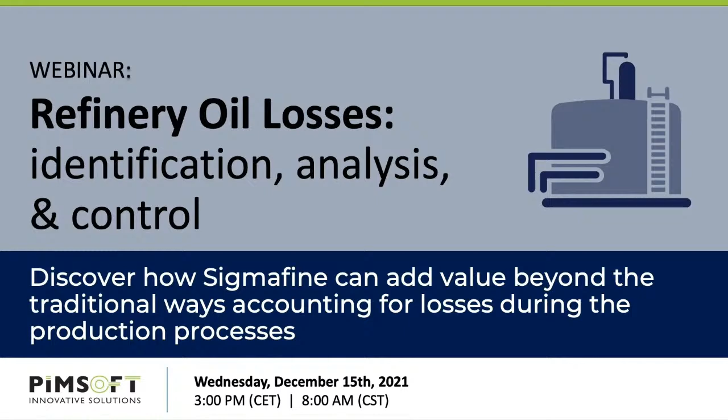Today, we want to demonstrate Sigmafine's approach to support refinery oil losses identification, analysis, and control. This webinar will discuss how Sigmafine, leveraging data reconciliation and improving the management of material movements, will have a positive impact on the accuracy of loss accounting. Today you will learn the best way to identify losses, how Sigmafine can play a key role in a loss reduction program.

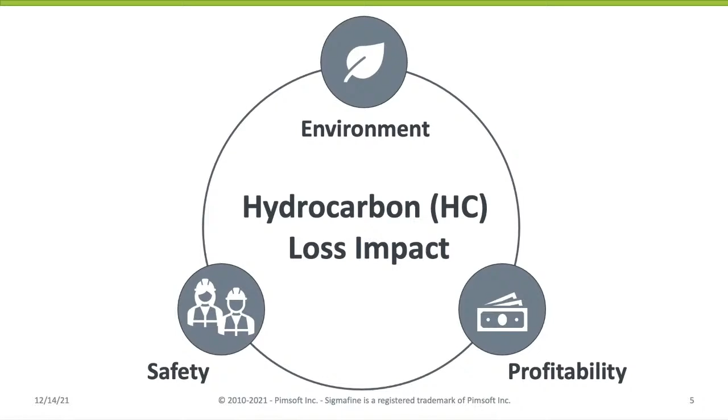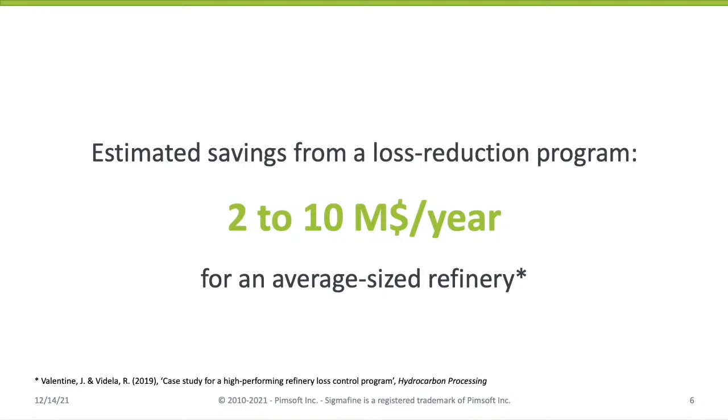Regarding the last point, it has been estimated that a loss reduction program can bring savings in the range of $2 to $10 million per year for an average size refinery.

Moreover, thefts are one of the most obvious forms of leaks, heavily affecting the oil and gas industry. Very famous is the case of Shell Singapore refinery, where thefts have involved several levels in the company and several years, reaching an estimated amount of around $150 million.

Moreover, Ernst & Young estimated that worldwide in 2021, around $133 billion worth of crude and refining products are stolen or adulterated every year, which is quite an impressive figure.

So today we have identified already some important reasons why we should care about refinery losses. But now let's understand better what we mean by loss.

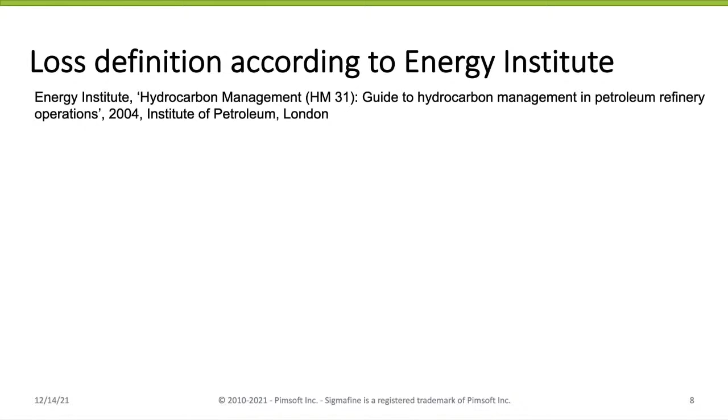In this presentation, we will use the approach and definition given by the Energy Institute, more specifically the HM31 guidelines. If we analyze a facility, on one side we have the inputs, which we can describe as process inputs, such as receipts and imports of materials, and inventory changes in the feedstocks. On the other side, we have the process outputs, so the dispatches, consumptions, fuels used as internal consumption of the refinery, and finally the inventory change in the products. The difference between the two sides represents the total losses of the refinery, and later we will analyze them in more detail.

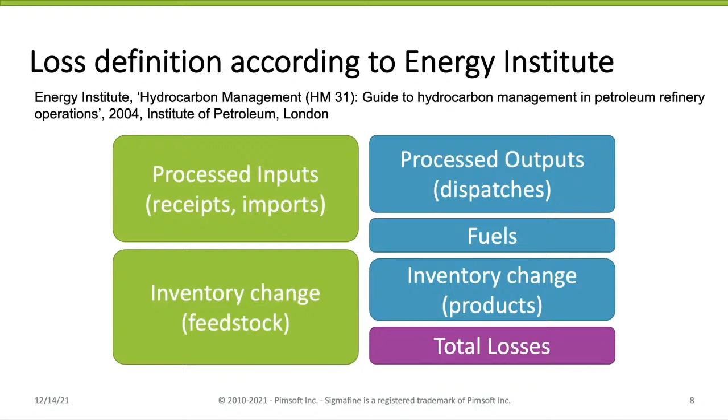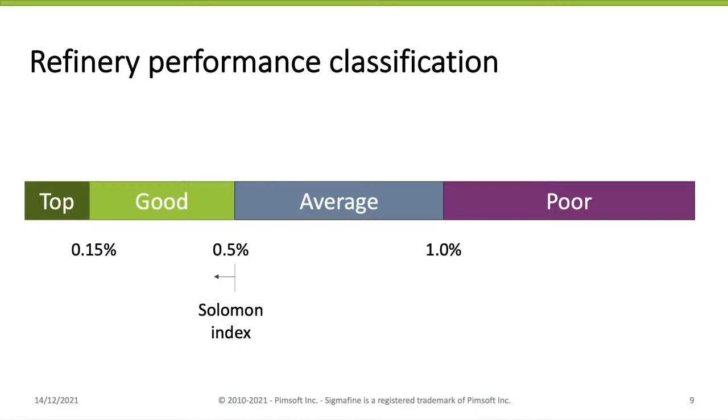Losses, of course, fluctuate over time, so a statistical analysis on the losses is important when doing a loss control program. In this case, the trend in green represents the aggregation of 3 years of historical data based on monthly losses, which is the baseline of the distribution of the refinery losses. In orange, we provided the corresponding statistical distribution.

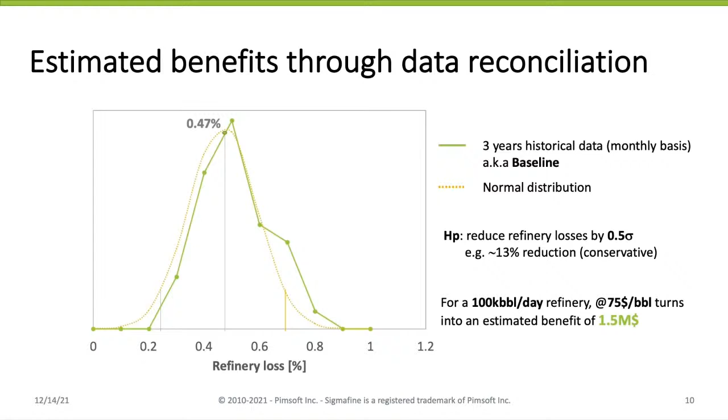So if the expectation is to reduce the losses by an amount which is half the current standard deviation, this will translate into a benefit of around $1.5 million, considering a 100,000 barrel per day refinery and a price of $75 per barrel. Again, this is the benefit you might achieve by applying data reconciliation only, without taking into account changes in instrumentation. So let's see how this is possible.

The procedure starts by taking into consideration the total measured losses, which can be divided into accountable and unaccountable. By accountable, we mean losses that are either measured, for example flares, or that can be estimated, for example using some correlation to estimate the evaporation of tanks. The unaccountable instead represents what is not measured: the random error, bias, leaks. So altogether, that's the part you cannot account for.

The role of Sigmafine is to reduce the inconsistencies between the inputs and the outputs. At the same time, it also reduces the uncertainty of the data. Therefore, it can have a double action, both on the accountable and on the unaccountable losses. So finally, the total loss reduction turns into economic benefit.

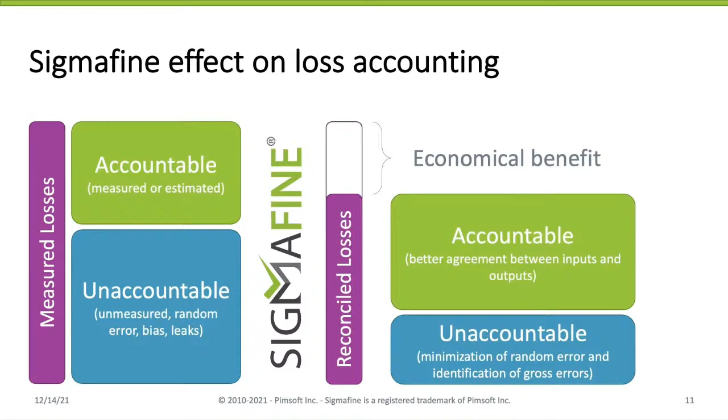Let's see a practical example. So a typical loss report, you see it on the left, based on the measured data, so before the reconciliation, and then the same report is presented based on reconciled data.

We see that in this case, the reconciliation was able to improve the agreement between the inputs and the outputs. By doing so, the reconciliation reduced the level of inaccuracy in the data, spread the random error, and therefore had a positive impact in reducing the total losses and more specifically the unaccounted losses. The accounted losses in this case were already quite well measured.

Even just reducing the unaccountable losses, the reduction we got is around 0.4%, which for this type of refinery, considering the throughput and also considering the oil price at $75 per barrel, turned into an economical benefit of $1 million per year.

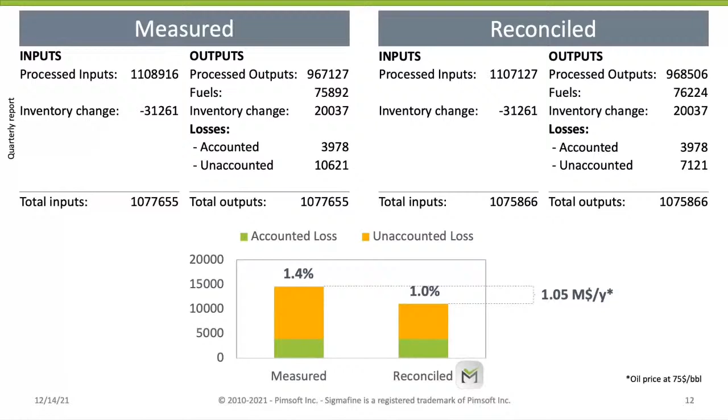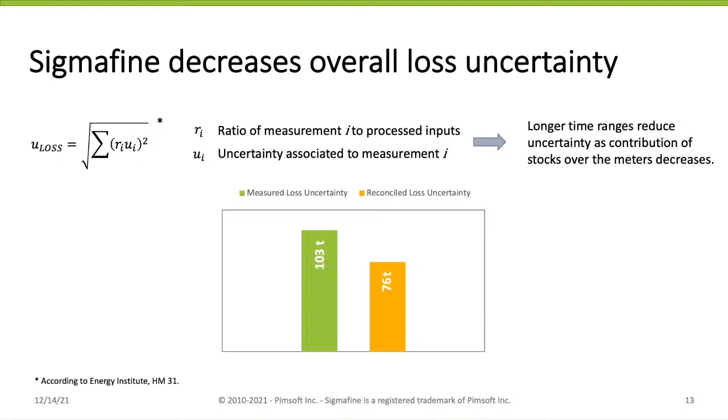Furthermore, Sigmafine decreases the overall loss uncertainty. So not only the loss value as a whole, but also the uncertainty associated. Here we reported the formula indicated also in the guidelines of the Energy Institute to calculate the total uncertainty and how to aggregate the uncertainty of each component of the losses and come to the final figure. So also in this case, the associated loss uncertainty has been reduced. The numbers we are looking at are more reliable compared to the raw data.

If you want to start a loss reduction program, these are the suggested steps to be implemented, considering that this is an iterative process for continuous improvement. You don't do it once for all, but you need to make it become a practice in your facility. First of all, you need to do an analysis of the current status of the plant losses, taking into account the history of your data, typically not less than 1 year.

By looking at this data, you will create a baseline, so you will understand what is the current level of the losses in your facility. From the baseline, you will make up a potential target and then create a set of actions to be taken. Actions that are twofold.

On one side, on the balance, and we have seen how the introduction of Sigmafine can improve the values. On the other side, on the instrumentation. And also here we will see how Sigmafine can suggest how to improve the instrumentation to further reduce the level of losses in your plant.

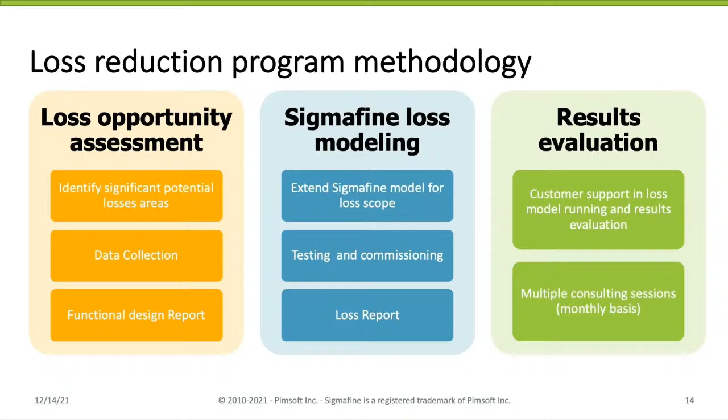After running the balance for a few months, the results need to be assessed and actions taken on that basis. After 1 year, a new baseline can be reasonably created and compared to the previous baseline to evaluate the overall benefit.

So what does this mean in terms of Sigmafine modeling? Moving from production accounting to loss accounting requires also a shift in focus. In terms of time range, typically we move from daily to monthly cases.

So the total amount of the measured value can be fed aggregating the reconciled data of the daily cases, and also the tolerance can be set as the average of the reconciled tolerances of the days. Also, for the stocks, we can take a similar approach.

For the stocks, we need the opening and closing on one side on the daily production day. On the other case, so for the loss accounting, you need the monthly closing and opening. The tank tolerance is typically 0 for the production accounting because in many cases, tank quantities are considered fiscal quantities.

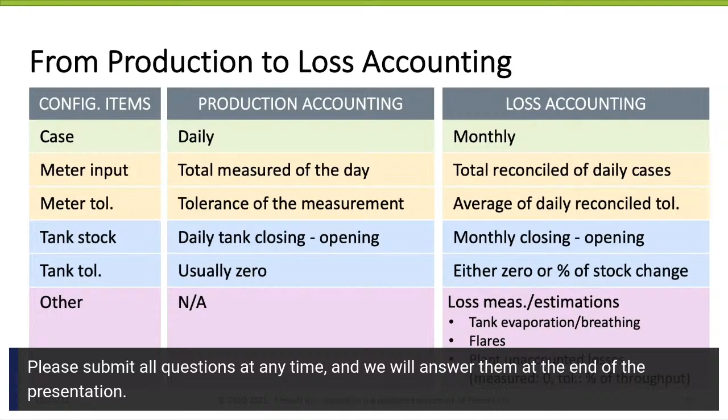For loss accounting, this is not always true or mandatory anymore. So you could consider this either 0 or consider it as part of your loss or gain effect, and put it as a percentage of the stock change.

Finally, for loss accounting, you need to feed more information to the model. So you may want also to include estimations and so increase the level of accountable losses and reduce the level of the unaccountable. So you want to include flares.

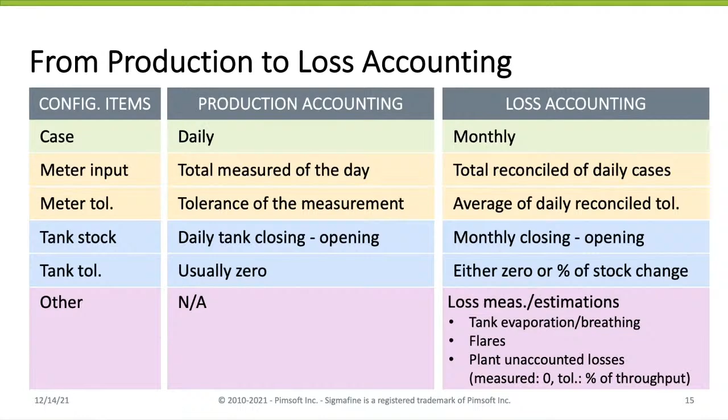You may want to include correlations for tank breathing and tank evaporation. And finally, of course, you need to represent the unaccounted losses. To do so, you can create, for example, a meter which is measured at 0 with a tolerance set as a percentage of the throughput.

Now let's analyze in more detail how some of the Sigmafine functionalities can improve the balance and help reducing the losses.

One of the biggest sources of gross errors, which heavily impact also the losses or mask part of the losses, are the misdeclarations of movements. On one side, there is the Sigmafine diagnostic that helps identifying major imbalances around nodes and inventories, and it can detect areas where possibly a movement declaration was missing.

For a more comprehensive approach, we suggest instead implementing a dedicated application for the movement management, such as the Sigmafine Intelligent Movement Management, which is fully integrated with the Sigmafine models. So the movements that are declared with IMM are readily available also for the balance.

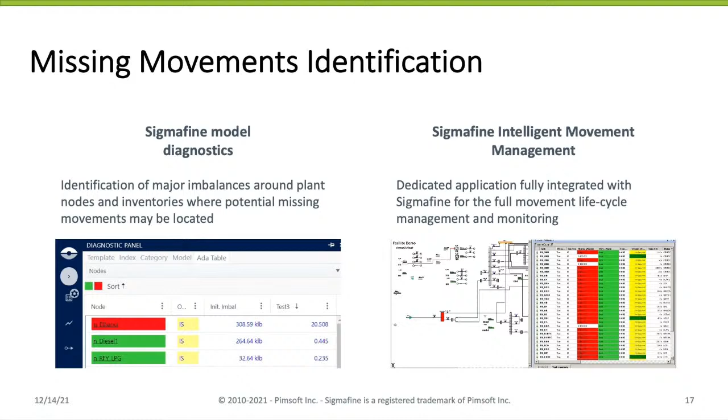Another source of gross error is related to the conversion from volume to mass basis, especially in the crude area. One issue is related to the density, which might not be adequate enough. The composition and quality tracking algorithm can take care of the different blends of crudes. So if you monitor the type of crudes, you have some measurements, plus the quality tracking, you can have a more detailed estimation of how the density is changing, day by day or even hour by hour.

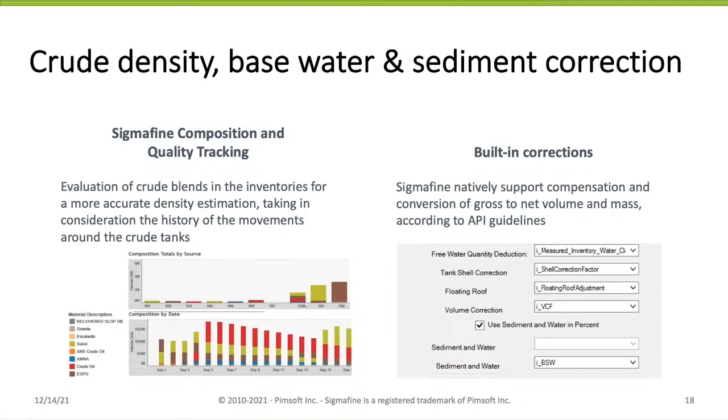The second error is related to the overestimation of the amount of crude due to the presence of water or sediment, which are all mixed together before they are separated in the desalter. Sigmafine has built-in corrections to take care of the information regarding the amount of water and basic sediment, so it can automatically correct the amount of hydrocarbons, which are used to feed the mass balance.

Similar actions can be taken on the compensation of measurements, especially for orifice plates, to correct with pressure, temperature, even compressibility factors in case of gas. For the fuel flow rate, sometimes there is an online gas chromatographer available, so you can use it to get the molecular weight and then use this figure to compensate the flow rate. In other cases, you can just put some estimate, but it's always suggested to put a compensation in place.

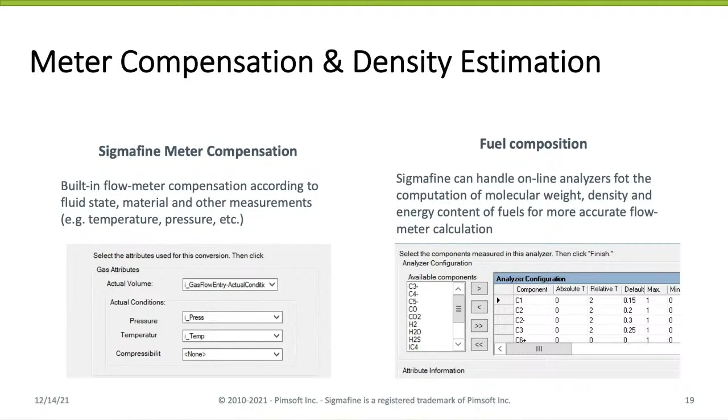Last but not least, software like Sigmafine supports internal and external auditing by providing data quality KPIs associated to the balance, and by recording all the data changes performed by users. This will help decrease the rate of human error, which can be either unintentional or intentional, in case of the thefts we talked about at the beginning of this presentation.

We also briefly talk about measurement devices, because although the presentation is mainly focused on the data reconciliation impact in a loss reduction program, we cannot overlook the effect of measurement devices, which on the long run account for a major part of the benefit when the performance baseline is poor.

Here is a brief summary of the best practices in different areas. For crude, Coriolis flow meters provide direct mass measurement, and sometimes they also give you the associated density. These are two critical parameters, as the crude flow rate is one determining the flow rate and performance of a refinery, so having the associated density will provide better information on the overall feedstock. So we work on the inputs.

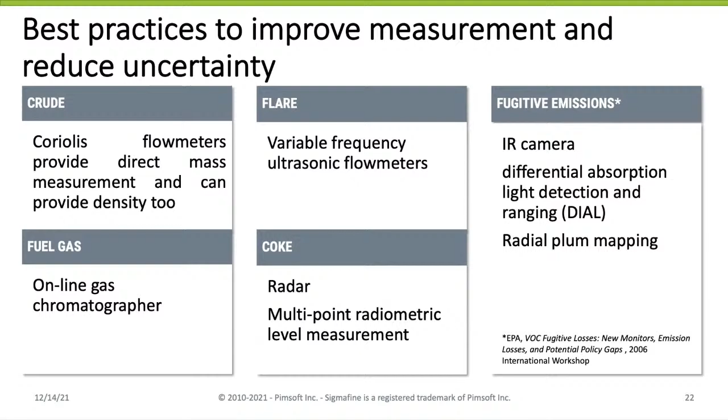Finally, fugitive emissions - this is an entire class of emission that typically involves the tank farms, and many times are underestimated. Recent studies confirm that. Some of the technologies currently used to measure them are based on infrared cameras, DIAL, and radial plume mapping - these are a few of the technologies that can be involved in measuring emissions. There are correlations in the literature, but again, these correlations are also found to be quite under-predicting the amount of emissions.

Now let's introduce a few use cases. First one is Petrobras. Here, Petrobras is showing the level of losses before and after using Sigmafine for their loss reduction program in one of their refineries. They were able to reduce losses from 1% to 0.5%, which is really a significant amount.

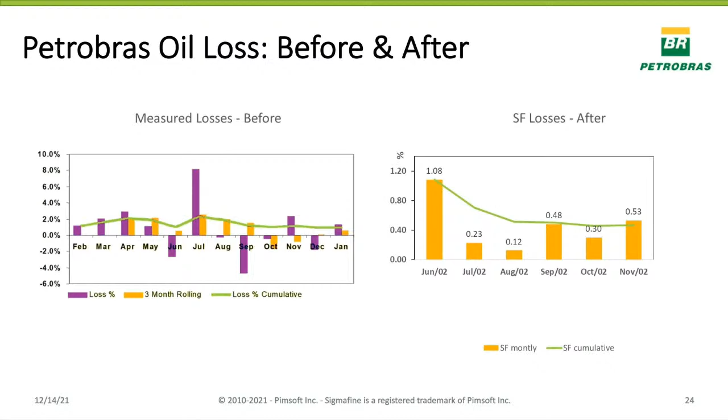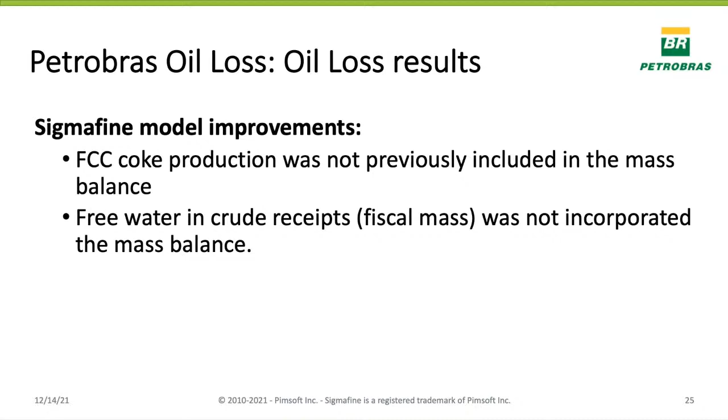Some of the improvements they made were the inclusion of FCC coke production in the mass balance, which was previously not included, and also incorporating and compensating for the presence of free water in the crude receipts, which was overestimating the amount of inputs from the feedstocks.

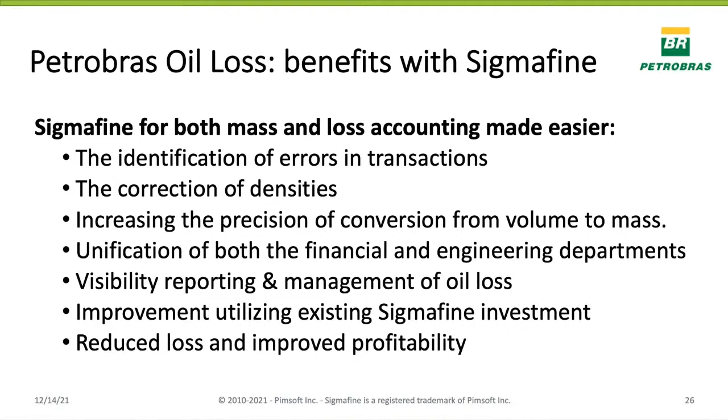For Petrobras, the main benefits of Sigmafine in both mass and loss accounting were the identification of errors in the transactions, the correction of densities - which we talked about before as being some of the major sources of gross errors - increasing the precision of the conversion from volume to mass, having a unified financial and engineering department, better visibility in the reporting and management of oil losses, and finally improving the return on their investment.

The second case is YPF, which was presented by Emerson last year. This relates to a case study in this Argentinian refinery. A full study was conducted to significantly improve the level of the balance, through also an improvement in the instrumentation - some of the best-in-class measurement devices were installed to improve the accuracy of the measurements.

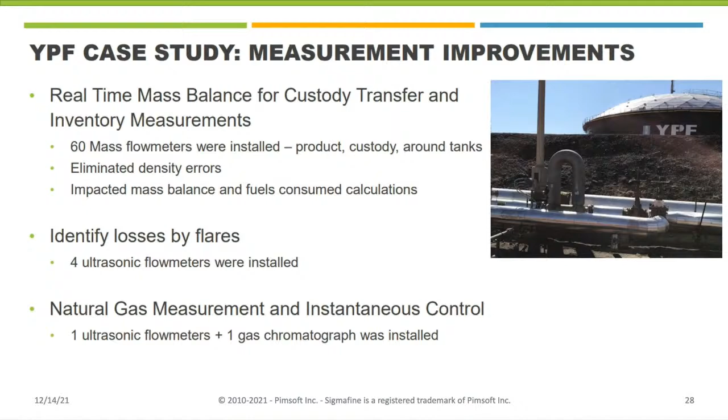You can monitor the data quality of your measurements by cross-checking measured and reconciled data. When you implement Sigmafine, a set of indicators are available to track this data quality, which supports your measurement selection.

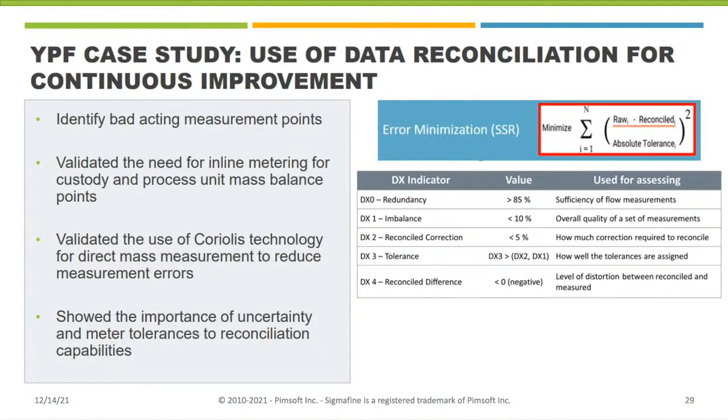In this specific case, the baseline was very poor, showing an initial imbalance of 7.5%. Measurement compensation greatly improved the balance, leading to a 4% reduction, and an additional 3% reduction was achieved by installing new meters. So finally, the resulting imbalance was in the range of 0.5%.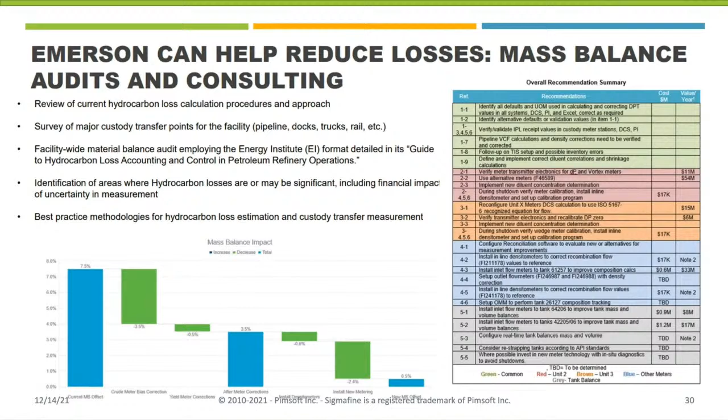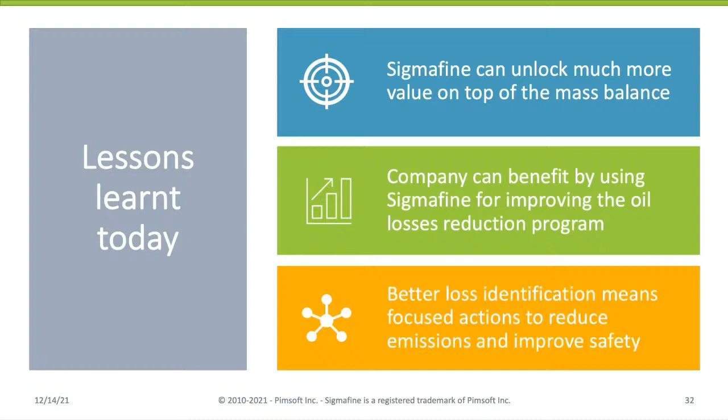So today we learned that Sigmafine can unlock much more value on top of the mass balance. The company can benefit by using Sigmafine for improving the oil loss reduction program. Better loss identification means focused action to reduce emissions, improve safety, and profitability. Thank you.